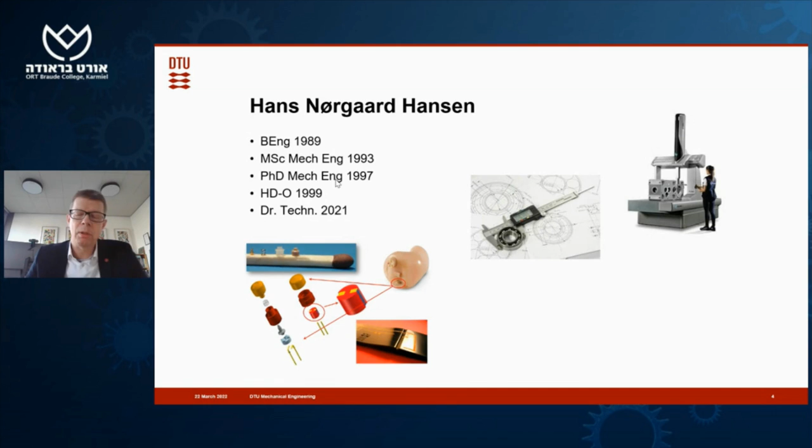If you look at the left bottom picture of this screen, you see a hearing aid. This is a type of hearing aid which you put into your ear. And on those hearing aids, you have many small functionalities like small buttons. The micromanufacturing could, for instance, be how do we actually design, produce, and make quality control of mechanical components which are quite tiny, below the millimeter in diameter.

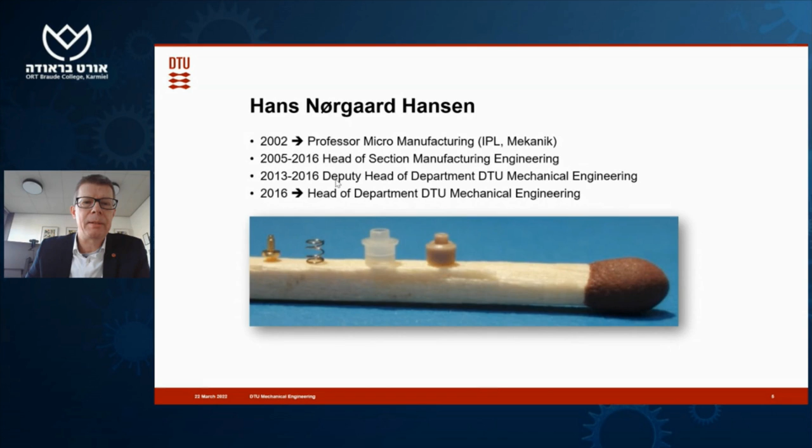I have been taking up different roles at the Technical University of Denmark, currently the head of Department of Mechanical Engineering. And I have also been active in the International Academy of Production Engineering, CIRP, where I'm currently the president. Back in 2017, I was also the president of the European Society for Precision Engineering.

So you may know CIRP, and if you do, please apologize for a few slides. CIRP was founded back in 1951 by 5 professors from France, Belgium, Great Britain, and Switzerland in order to promote scientific understanding of production engineering technologies in general.

Still today, CIRP is having a world-leading role in the field of production engineering to promote research and development among members coming both from academia and industry, to contribute to the environmentally sustainable global prosperity and well-being of society. CIRP is following that vision by...

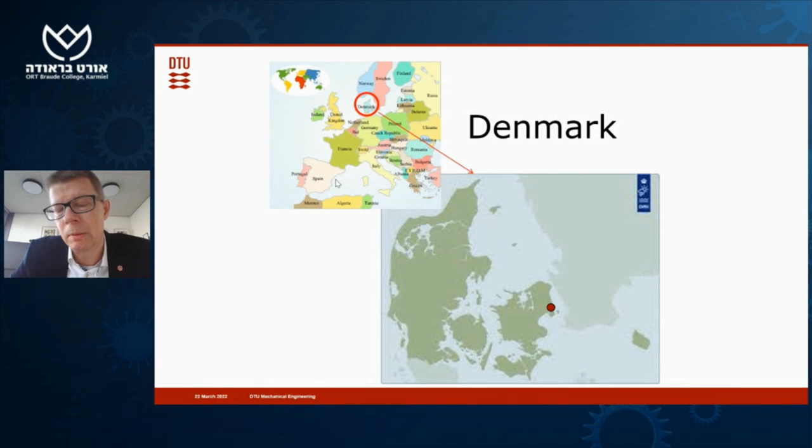So Denmark is a relatively small country that you may know. We are in the north of Europe. The Technical University is located near Copenhagen, which is the red dot here.

And it's actually a quite old university. It was founded back in 1829 by Professor Ørsted, the discoverer of electromagnetism, but also of aluminium. It was actually founded as a spin-out of Copenhagen University, with the purpose at that time to develop and create value to benefit society by looking into natural sciences and technical sciences.

And still today, this is the mission of our university, which means that, of course, we aim to do research at the highest level, but always with the intention to have the research results go into work in society, in the companies around us.

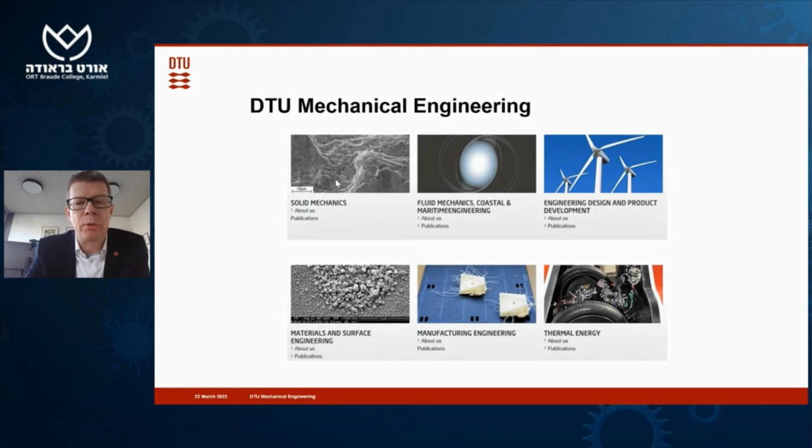The Mechanical Engineering Department is structured into 6 sections you see here, of which Manufacturing Engineering is one, and of course that's where I'm going to focus my talk today.

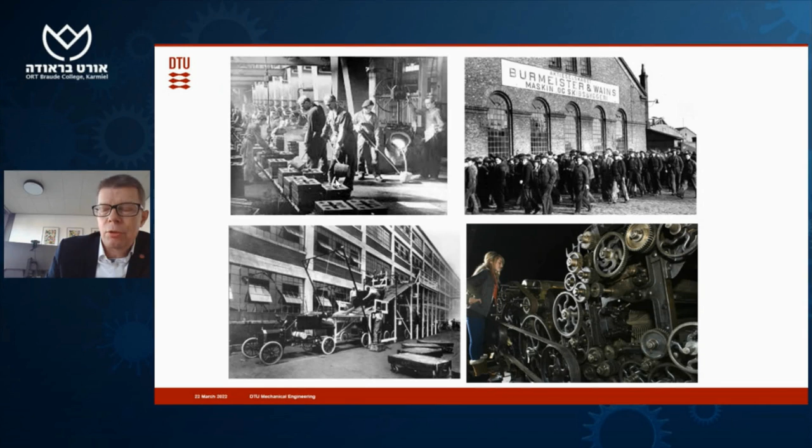The matter of fact is, of course, that modern production and modern manufacturing is far from that reality. And when people are then introduced to the reality as it is seen today, they get quite intrigued and interested in also pursuing research within the field of manufacturing.

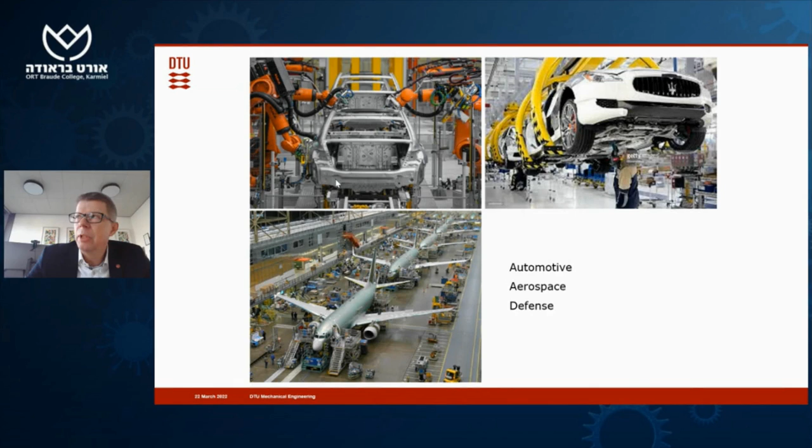So traditionally, I may say that usually a lot of research and development within manufacturing is driven by automotive, aerospace, and defense sectors. And if you look at Denmark, we are not having any of these sectors. In fact, the production sector in Denmark is relatively different from what you see in big countries like Germany, France, or UK.

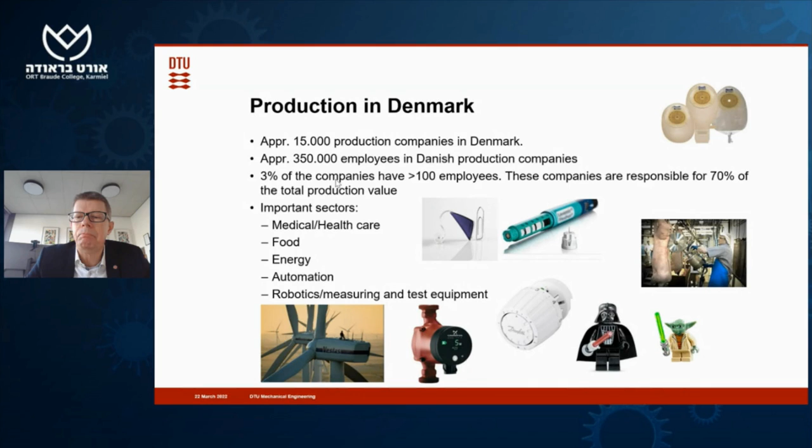This is background for discussing, back in 2000, the situation of Danish manufacturing industry and the level of competence in that industry. On the basis of that, the Danish Industry Association, together with leading companies and universities in Denmark, proposed to start the Manufacturing Academy of Denmark, in short, MADE.

At that time, outsourcing was the big animal in the discussion. If we could just outsource to low-wage countries all our manufacturing, then we would be in a good spot for the next many years. But what also happened was that the companies, the big companies first, realized that by outsourcing production, product development skills also slowly but surely disappeared. Around 2010, the big companies realized that something needed to be done if you wanted to maintain a leading position as a product developer and manufacturing company also in Denmark.

So a political effort was made to set aside some money that could be applied for by a consortium, and this was done in 2013. I was one of the professors writing these proposals, and the organization was launched back in 2014.

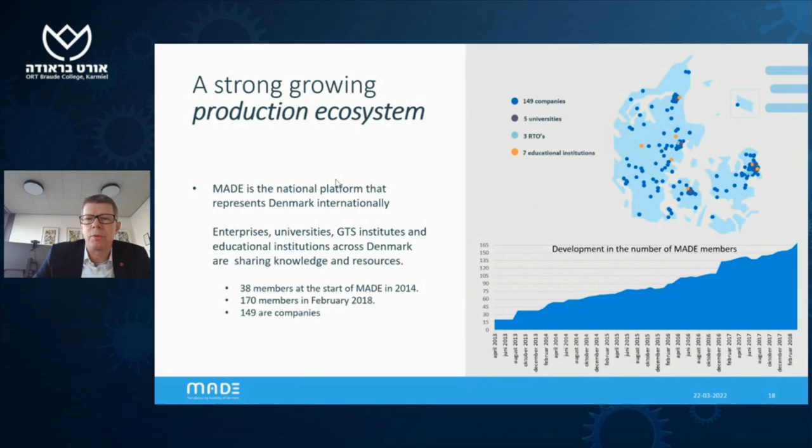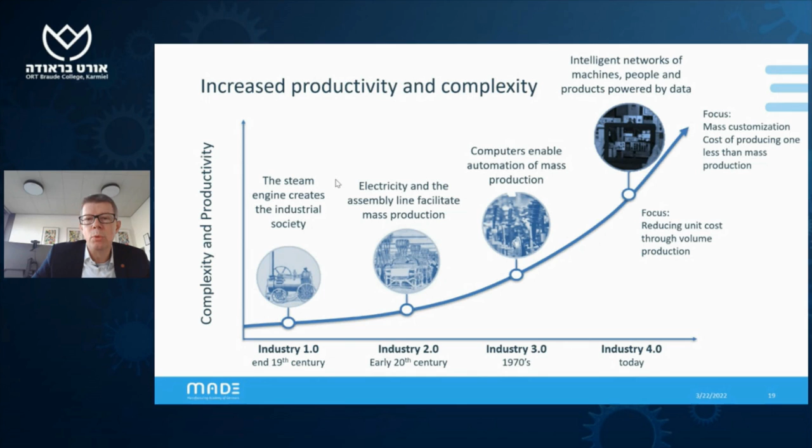Also, in the period from 2010 to 2020, the increased pressure on companies of all sizes due to the digitalization of manufacturing has become quite intense. So the pressure to change has been significant, not only because competitors were pushing companies, but also because customers, big companies, were putting a lot of pressure on their suppliers, the small and medium-sized companies, both in terms of components and technology. This has of course helped move the attention towards also performing research.

So how do you get a very diverse group of companies to actually agree on anything? That was the big question back in 2013, where I used a couple of months together with two colleagues to tour Denmark, to visit companies and hear what their problems were, and consider what a program addressing these problems could look like.

What you see here is a 3x3 matrix. The columns have titles, and these titles you could call focus areas. After these two months of road trip, it was quite clear that most companies were interested in performing research that could help them get product and production developed at a higher speed. Many were interested in how to use models in their planning, execution, and optimization of production. And quite a few were interested in either lowering complexity of their production systems, or being able to manage higher complexity than their competitors. So these three columns mark the industrial interests.

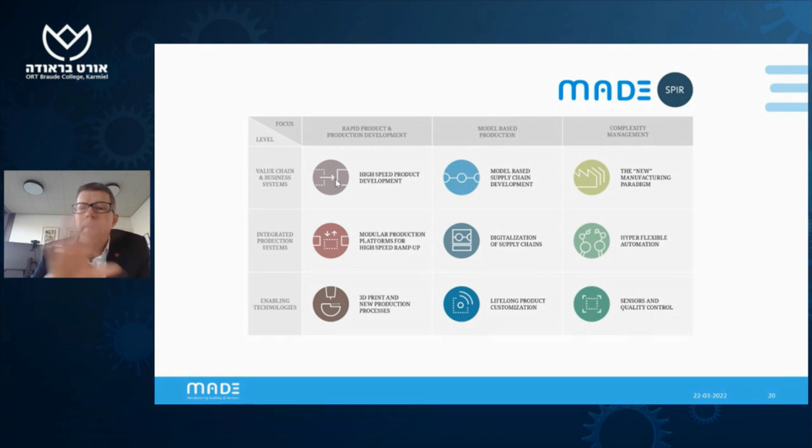So if you were a company like the Danish company Grundfos, who makes pumps and pump solutions, they were focusing entirely on the first column of rapid product and production development. A company like Danfoss, making heating and cooling solutions, were primarily interested in hyper-flexible automation. And a company like Lego, producing toys, were primarily interested in enabling technologies. In this way, the framework and focus areas of single companies were then spread out across this matrix.

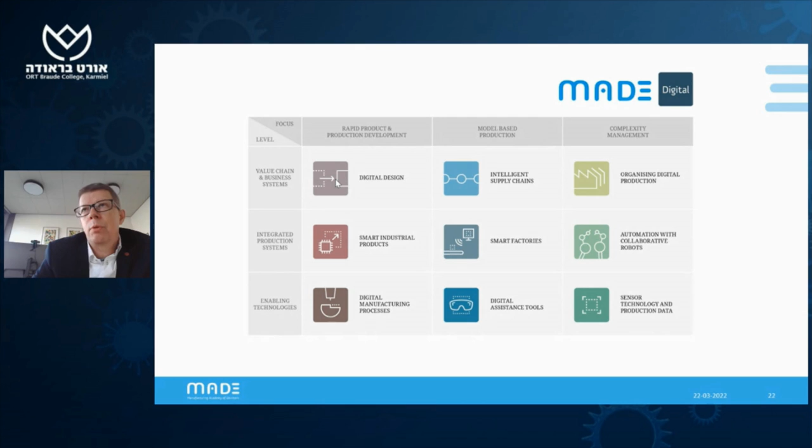As time went by, 3-4 years, it was quite evident that digitalization took up speed. A digital layer was put on top of the original layer, still spanning the same 3x3 work packages, but now with a digital touch. This led to a new application, a new funding scheme where digitalization was in focus. Still, companies would have to find themselves and their challenges within this scheme, and many actually moved from the first scheme to the second, broadening their field of interest after having seen how it worked in the first place.

The working principle would be to start by identifying industrial challenges, based on that define research activities, run pilot projects in the companies who have been defining the industrial challenges, and then take out general learning points that could be transferred to the large number of small and medium-sized enterprises out there.

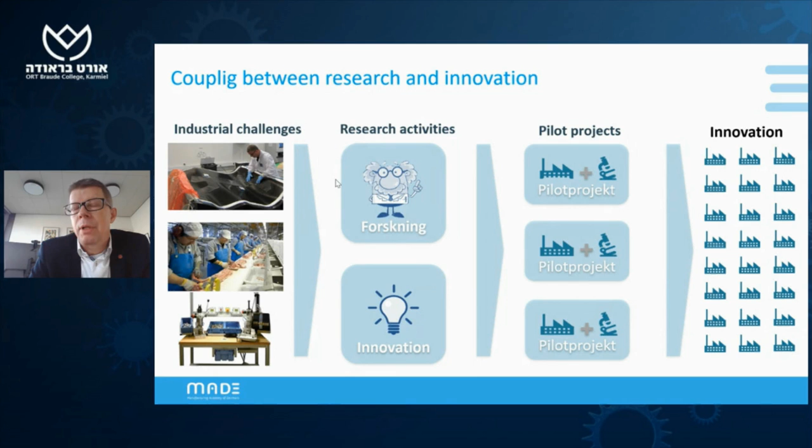To give an example on hyper-flexible automation, 3 industrial challenges were identified. One was related to how to automatically place carbon fiber mats for fiber reinforced plastic components. You see a picture here.

Another challenge would be to make reconfigurable automatic meat packing, where the components or products change component by component. And the last challenge was to have reconfigurable automatic assembly systems, where one day you'd be able to assemble a certain type of component and then quickly turn it over to do another type of component or another type of task the next day.

Research activities defined on the basis of these industrial challenges were the ones you see in the second column. These could be about delicate handling of deformable objects, real-time detection of such objects, part feeders, automated configuration of vision and sensor systems, or automatic design of a robot platform for industrial assembly.

These were, for instance, the titles of PhD projects, where PhD students worked on research activities, hopefully resulting in input that could be demonstrated in pilot projects at these 3 specific companies where the pictures are taken.

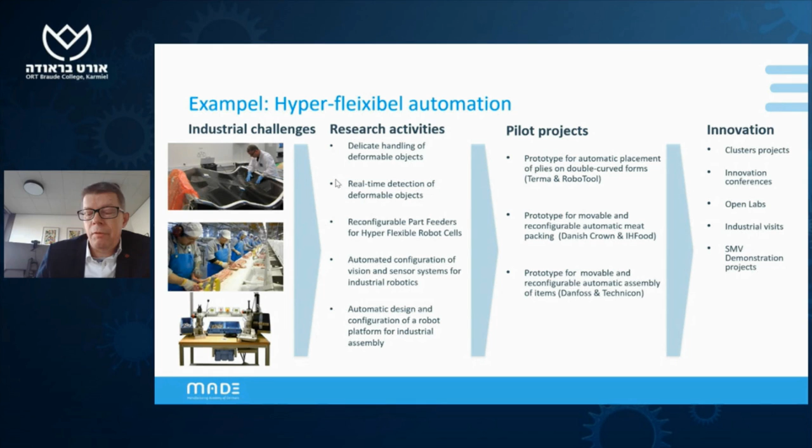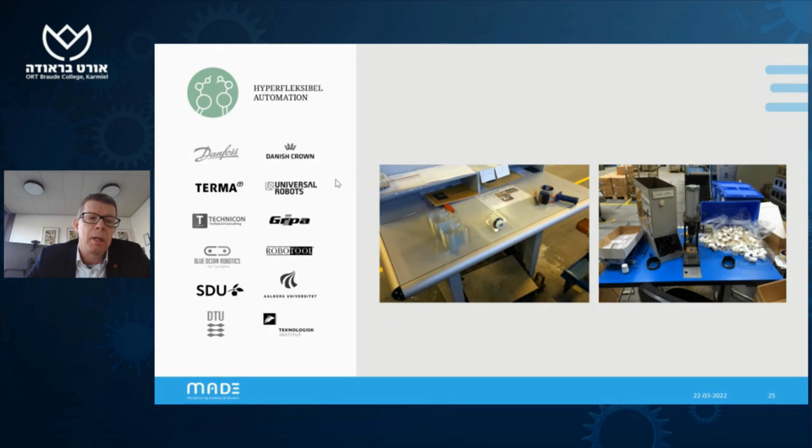Just to show you some of these projects: here you see 2 different products of the Danfoss company, who wanted them handled and assembled within the same assembly station. You see on the left-hand side the parties involved in that, and here a small video showing how the robot and the stations look, and how you can easily reconfigure them.

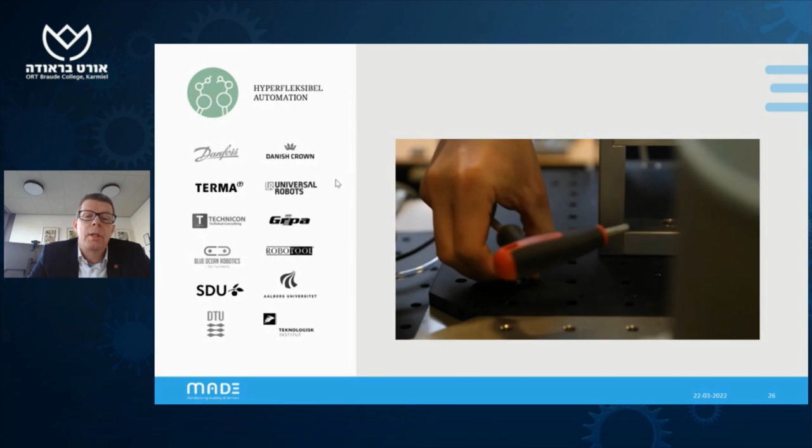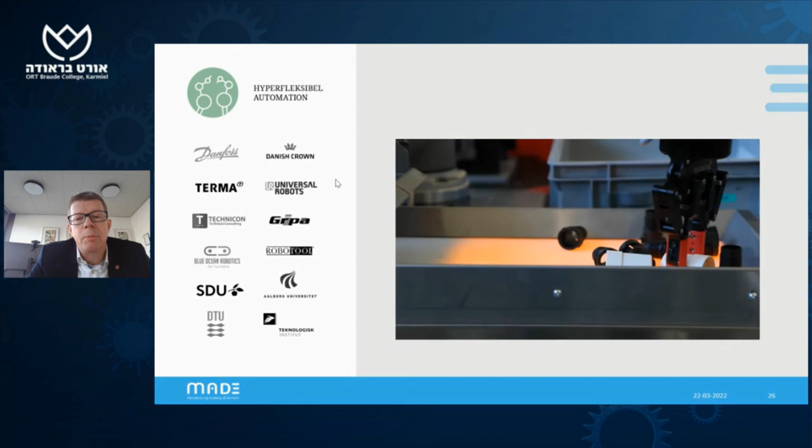The pilot project as such, you could argue, is probably not research, but in order to make the pilot project run, quite a lot of research had to be done, and this was performed in the PhD projects. So there's always a delicate balance when working with industrially relevant projects, to maintain focus on research content as well as the application.

This slide is in Danish. It's not meant as a free Danish course, but I didn't want to translate it.

Along the line of this initiative, the granting body, the Danish Innovation Fund, made a midterm review. What they did is ask the companies, for the specific solutions that have been provided, what is the value, or the increase in productivity, that you see directly from those activities? That's circle number 1, and you see 90 million Danish kroner.

They were then asked, if you were to implement those results in parallel production systems, what would the value be? That's bullet number 2, approximately double. And then, of course, the rest is speculation.

But let's say other companies in the MADE platform would have similar challenges. If those solutions were implemented in the MADE companies, what would the benefit be? There you see it suddenly gets quite big. And if we were to forecast, if all relevant Danish small and medium-sized as well as big companies would implement these types of solutions, what would the value creation then in fact be?

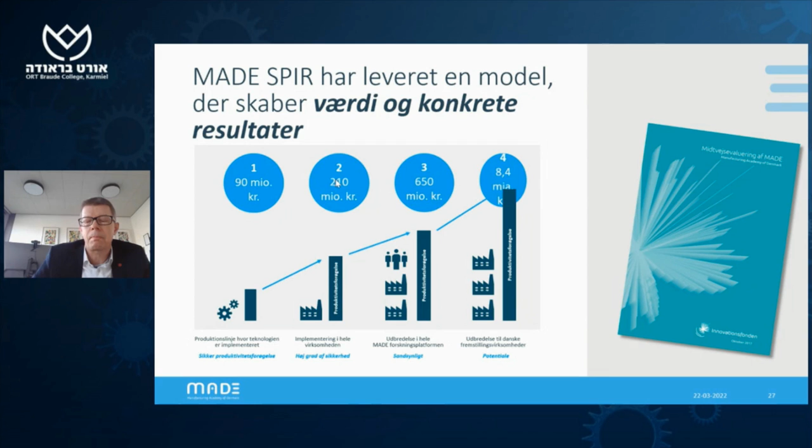So the Danish authorities, based on these types of analysis - and I admit you can always discuss the numbers - were quite happy with the investment, because the initial investment of the Innovation Fund was only, I would say, 64 million.

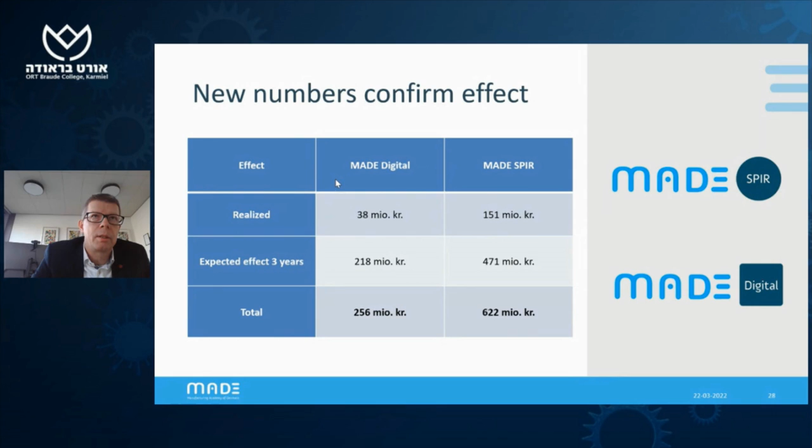Here you see again some numbers, taken when the first project was quite mature and the second project, MADE Digital, was only in its infancy. From a societal point of view, the total investment in these two projects was around 120 million Danish kroner. So you don't need to be a big professor to understand that the payback is actually quite good from this investment.

MADE platform uses a lot of channels to professionally communicate results, events, and so on. Made.dk would be the website. So if you are interested, I would urge you to go in, you can follow it.

All the companies who are part of MADE can follow these activities, can enter the conferences, can go for open lab visits and so forth for free. They pay a membership fee, and that allows them to gain access to all of this.

So two years ago, it was decided to go for a third round of funding. Every time, I guess it's the same in your country, you have to apply for funding, you have to come up with new ideas. And the new idea here was to focus more on sustainability and creation of talent.

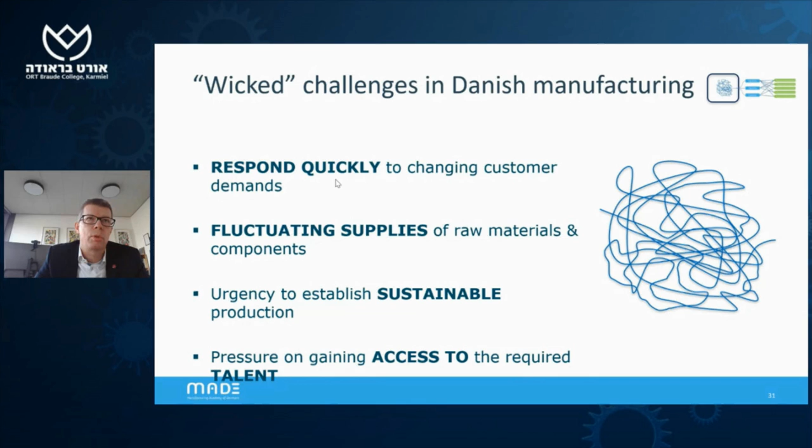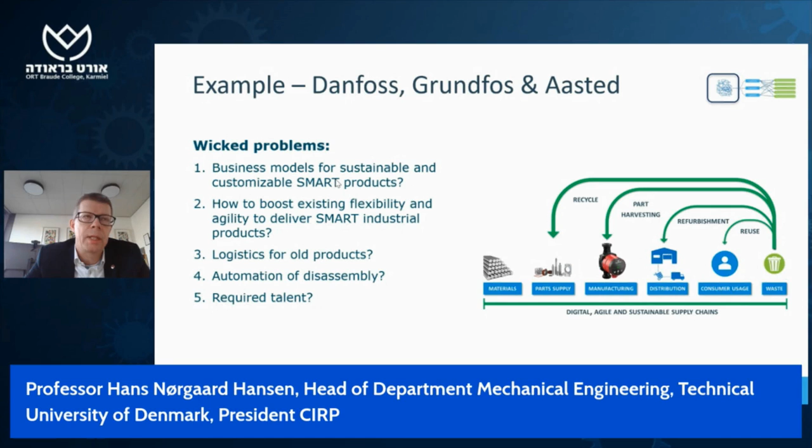Challenges were still the same, or even intensified over the years: quick response to changing markets, fluctuating supplies, increased pressure on sustainability, and the fact that companies are short of good skilled people to do the production. So many companies in Denmark struggled with how to actually go into this sustainability loop, into circular economy, and also what are the consequences for the way they organize themselves around that, from a product point of view but also from a production point of view.

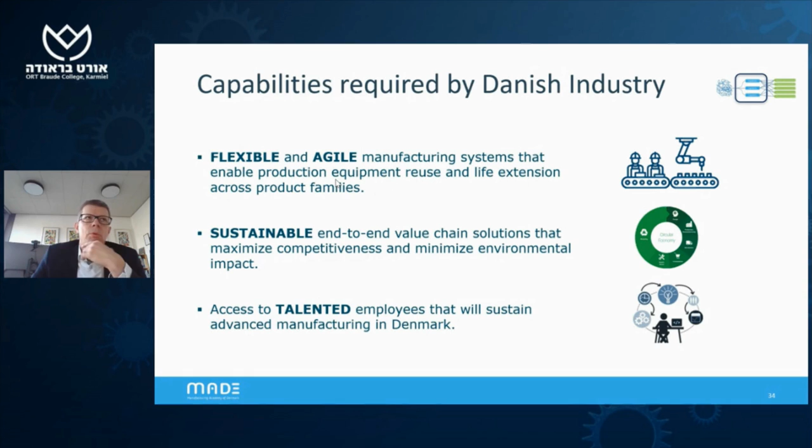So we used in the definition of this third initiative this technology development approach, and all the companies could agree on three main topics: flexible and agile manufacturing systems, sustainability, and how to get talents. That led to a different model, because something needed to be new for the funding agency. Again working from the very basic technology level to the business model level, but now on top of that, working on how to actually come up with the relevant competences for our workforce.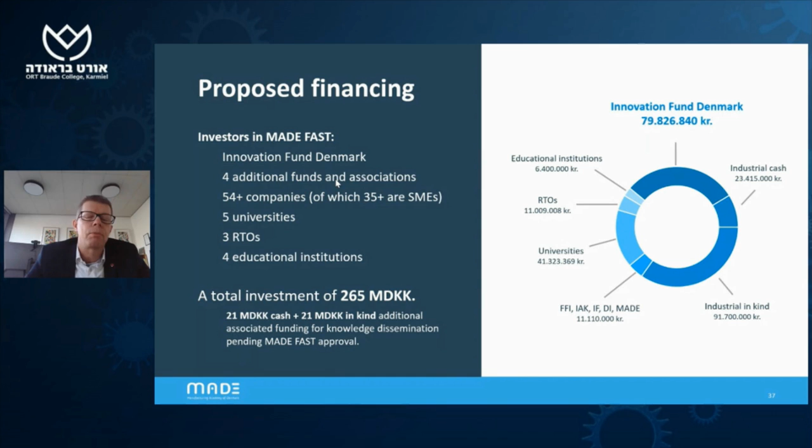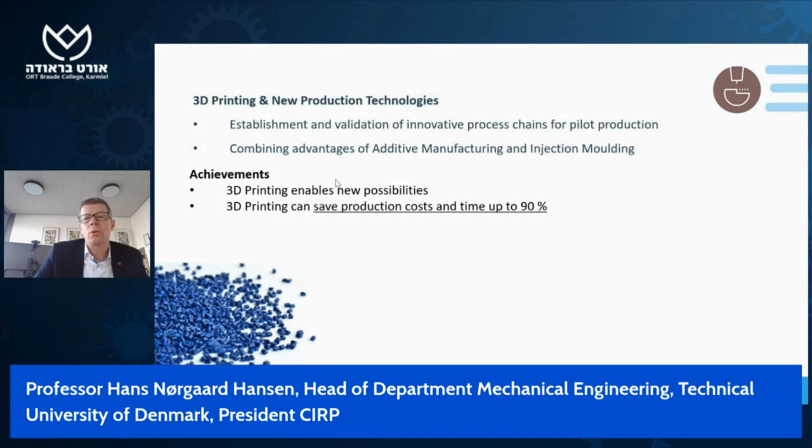Then I'll share a few thoughts, examples of what has been made under this platform about process chains for prototyping and pilot production based on additive manufacturing and injection molding, and of course 3D printing. I'm not going to talk much to you about that.

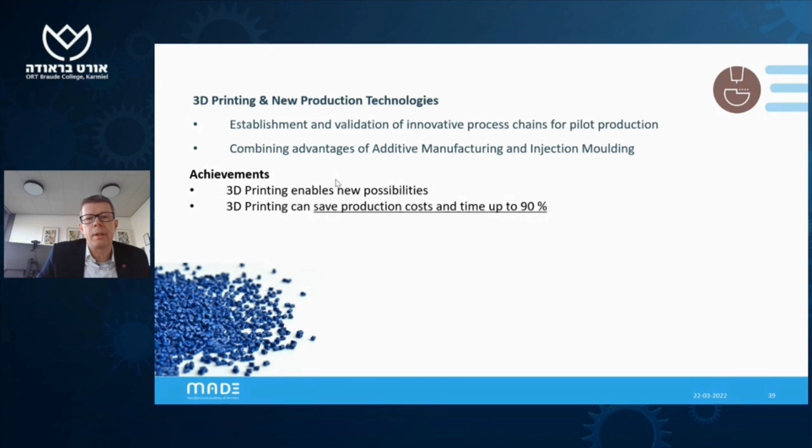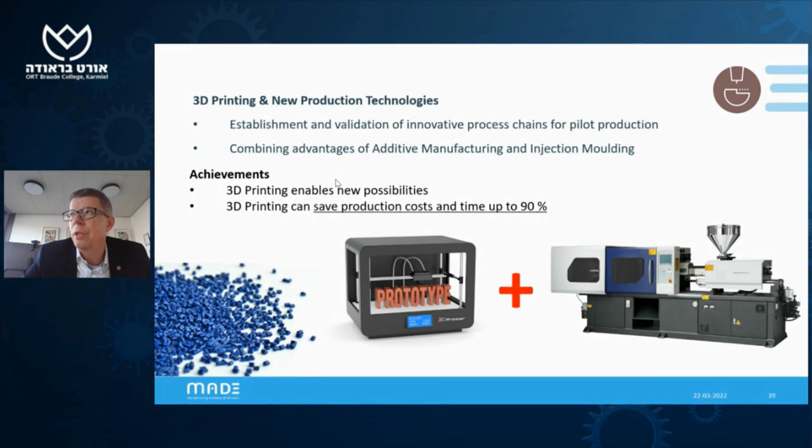If you 3D print plastic components, you may have problems getting the same material or mechanical properties of your parts as if you, for instance, injection mold them. So having a combination where you can quite quickly make mold inserts for injection molding and then injection mold was interesting. Of course you can make metal additive manufacturing to make permanent molds, but the idea here was to make polymer molds.

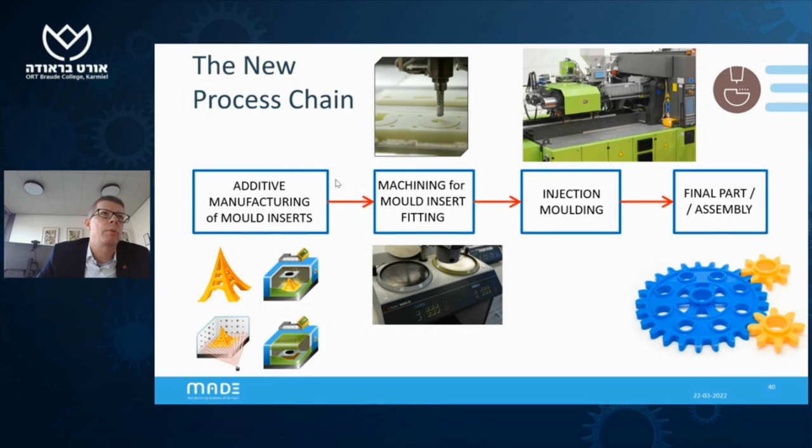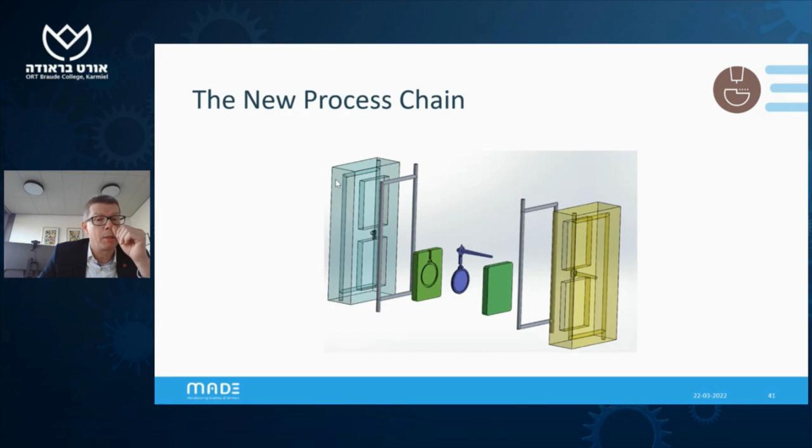We investigated this process chain. You will be able to find companies on the market who provide this service, but here the idea was to see how precise can we go and how can we work on the lifetime. So working with modular molds like this, where the green parts are the mold inserts which are 3D printed, fit into molds and then run with industrial machines in industrial settings with the industrial process parameters you would look for.

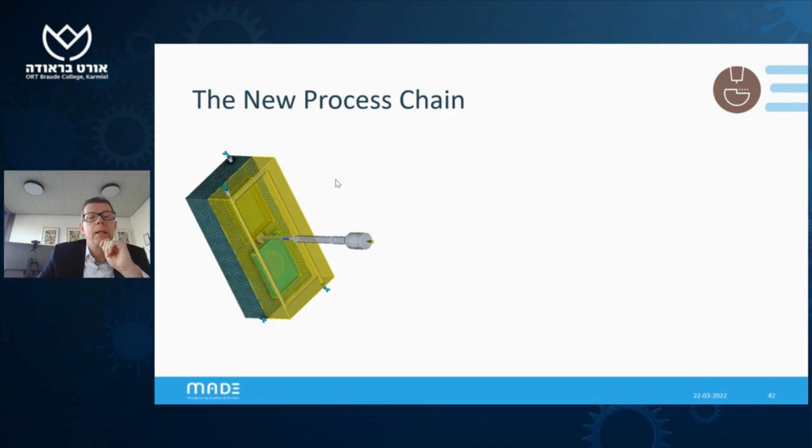Of course it gives you some challenges, because if you take a plastic mold, it doesn't have the same thermal or mechanical properties as metal molds, and that would influence the lifetime of the mold material.

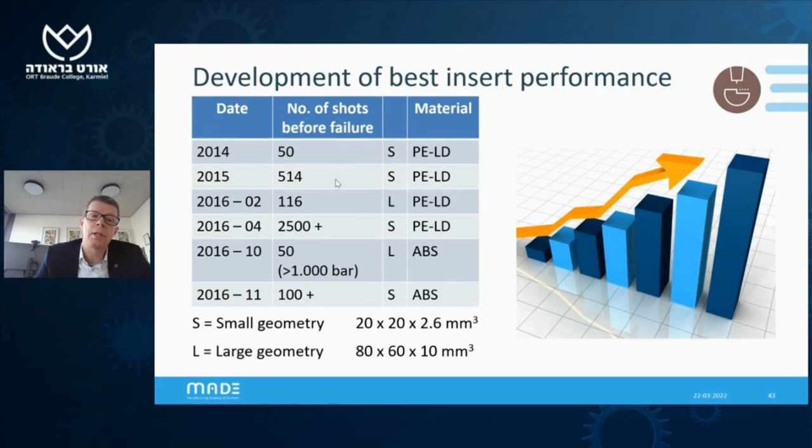We have reached, a couple of years ago, 10,000 shots in polymer molds under basic injection molding conditions, and with those types of results, suddenly for industry it becomes relevant to run pilot production with these types of methods.

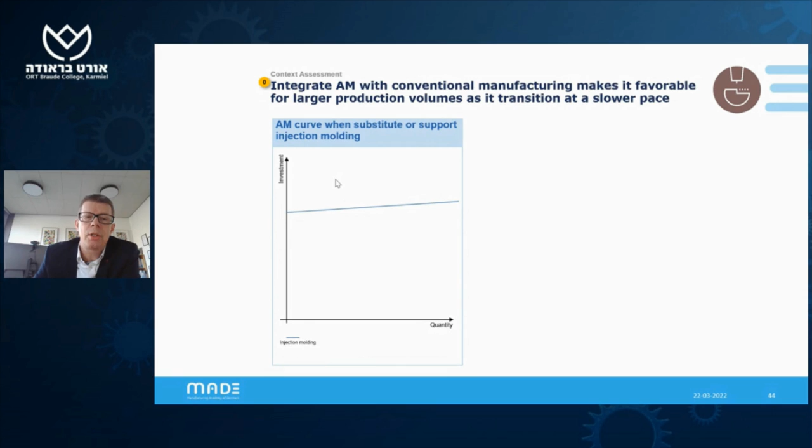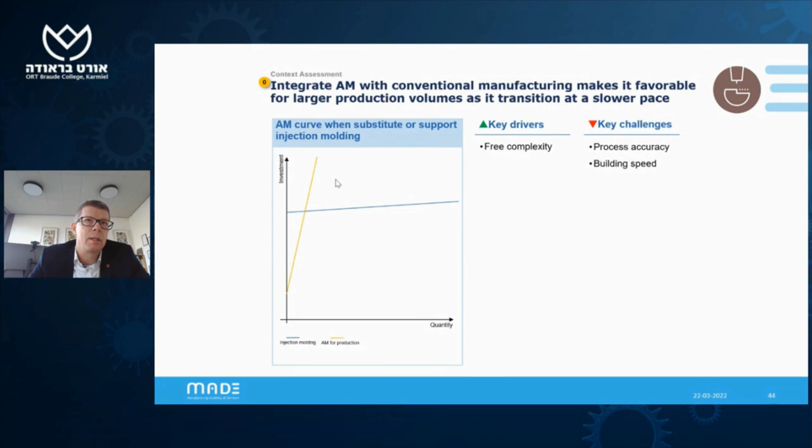The argumentation is, of course, that if you take an ordinary injection molding machine process, you have quite high initial investments. In additive manufacturing, your initial investments are not very big, but scalability is quite expensive. Therefore, combining that to use additive for making tools that may not last as long as a metal mold could be interesting.

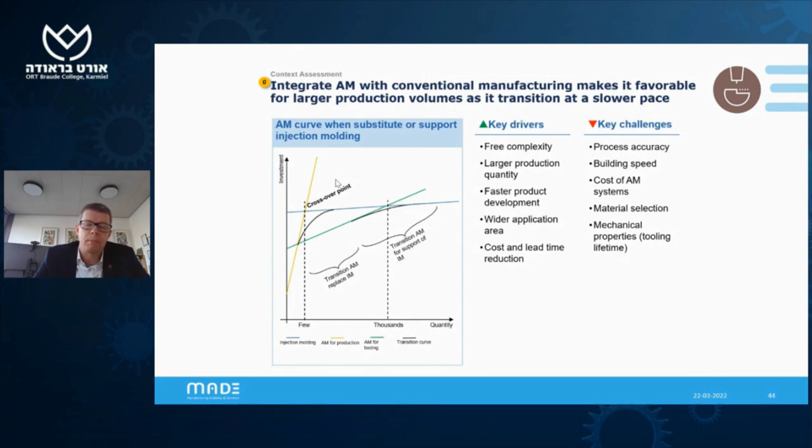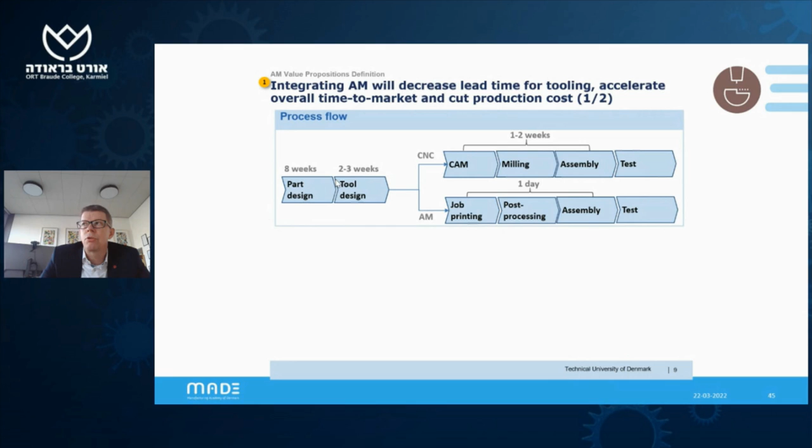We found that with an ordinary milling scenario of molds or mold inserts, you can actually cut your lead time by at least 1 or 2 weeks, which is interesting for many companies who want low lead times. And of course that affects the tooling costs, as you see here.

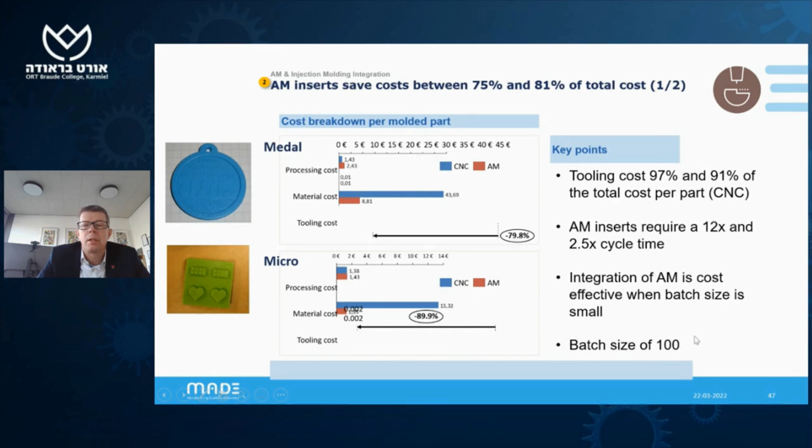We found that you could actually reduce tooling costs by around 90% in these two cases. And here you see the batch size that was interesting in this investigation was 100.

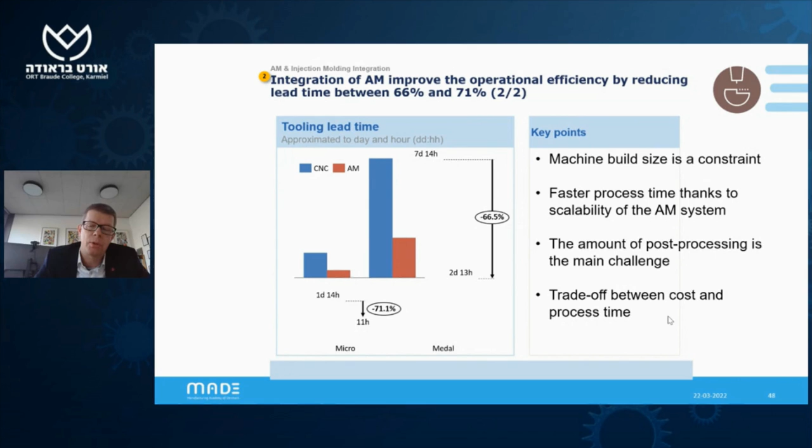Also interesting is the lead time, and in particular a company like the Danish Lego company producing toys are interested in testing new ideas with a very low cycle time, so a very high rate of repetition, and preferably in the materials that they also get when they do injection molding in an ordinary process, and therefore this is interesting.

We also conducted research together with companies under the MADE platform in doing what we call freeform injection molding, which is a low-pressure injection molding process where we use a 3D printed polymer mold, which is then, after the injection molding, dissolved, because you cannot get the part out in any other way. This, by the way, was also published in CIRP a couple of years ago.

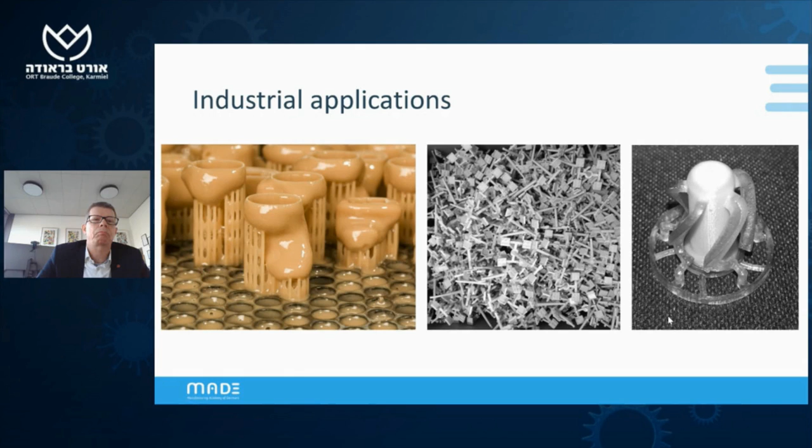And so recently we then combined these efforts with computer vision and some kind of machine learning, or at least neural networks.

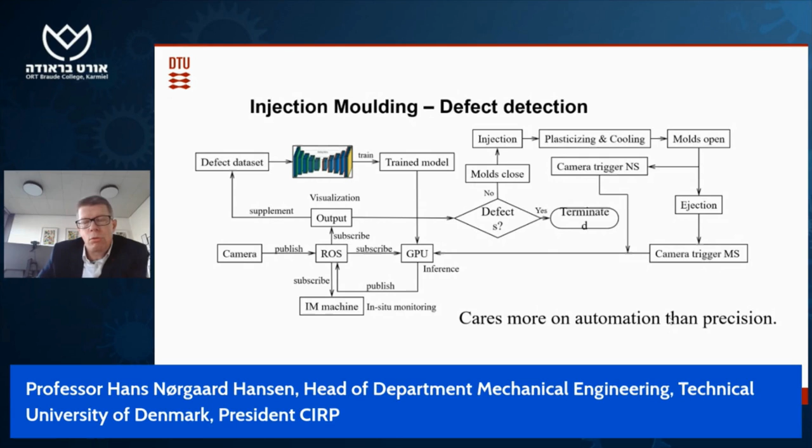I'm not expecting you to understand this graph in detail, but it shows that if you work with image processing of, for instance, pictures taken in an injection molding process, you would need to connect decision points with the pictures, and you would need to understand what it is you're going to look for.

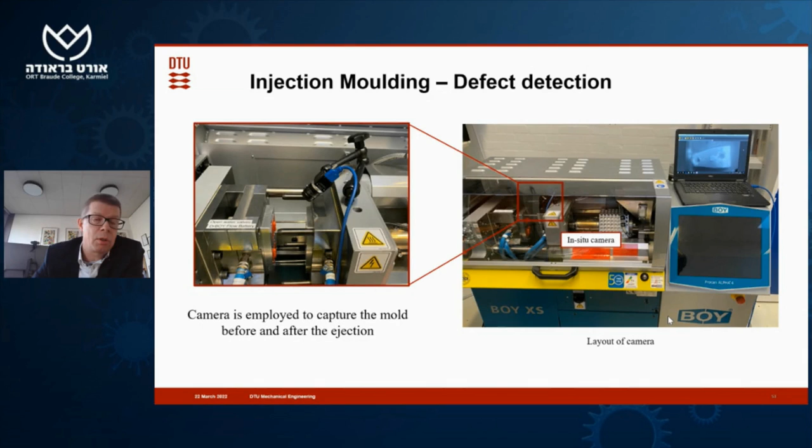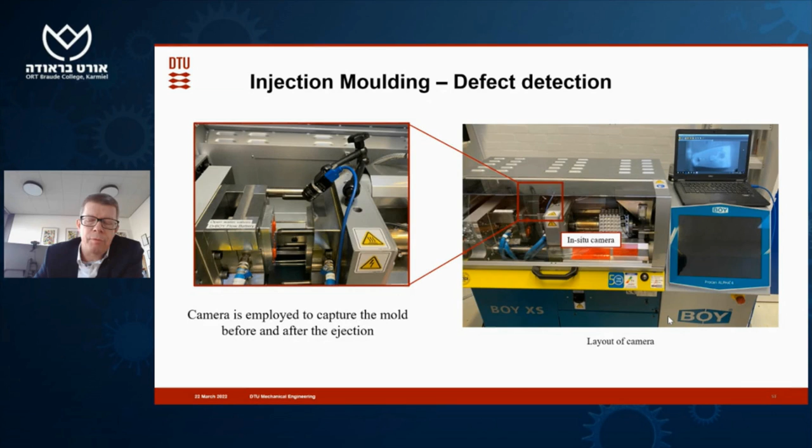And so we have conducted a research project where we equipped these types of injection molding machines with cameras. What you see here is one camera taking an ordinary picture, but also infrared cameras looking into temperature distribution.

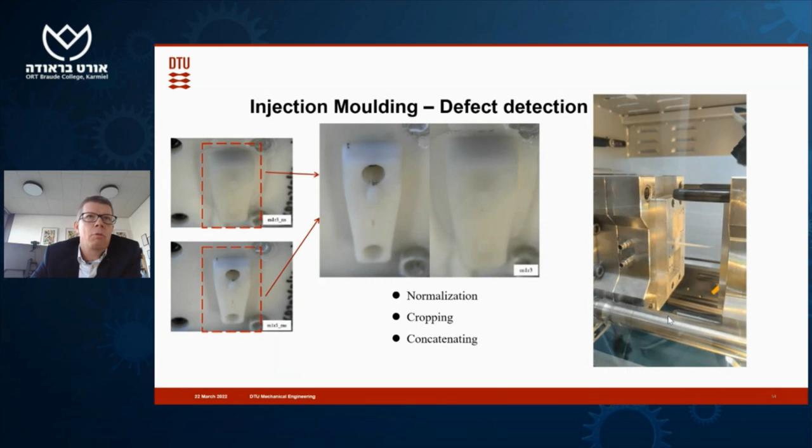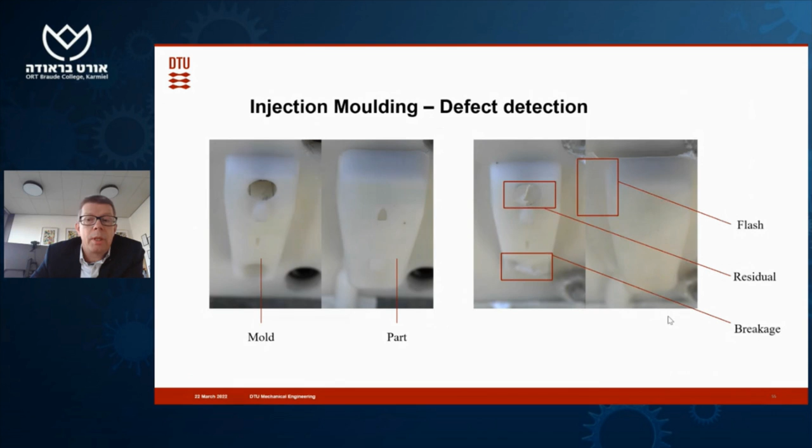Then we analyze the pictures, both of the parts and the molds, in order to collect a lot of data and to understand how wear is progressing in these relatively soft tools, using advanced image recognition methods to, for instance, recognize where we have flash, where we have breakage, and residual material.

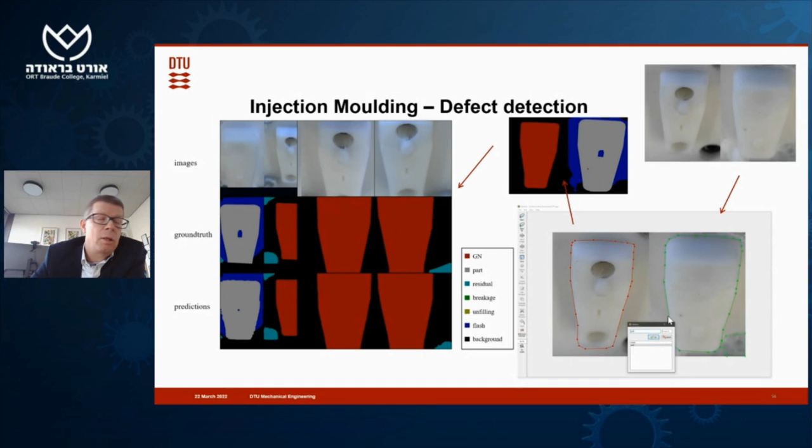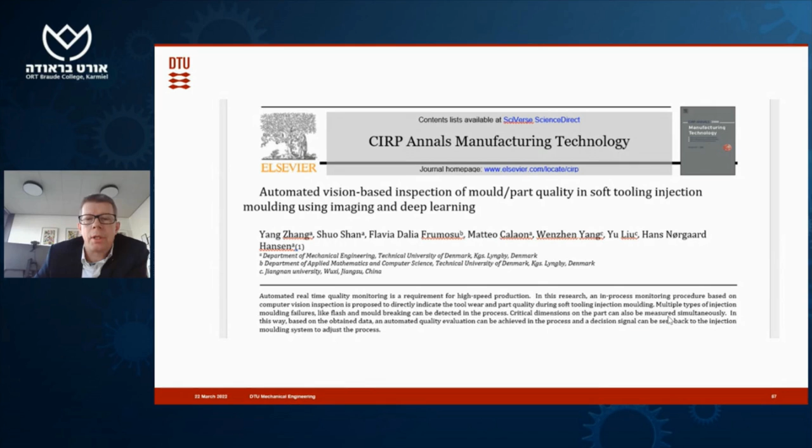Training databases in this way of how these things look, so that we are able to predict a failure in advance before it actually happens, and we can change the mold as it progresses. This is research which has just been accepted for publication, also in the CIRP Annals, for a presentation at the General Assembly this year in August.

So with this, I'm coming to the end. I have presented to you, let's say, the thoughts behind the way we have structured the Manufacturing Academy of Denmark, which is, in essence, a way to have industry and academia work together, but with a big focus on what the industrial needs are.

I mentioned the complexity of the way that this type of program is organized. I've given you a few examples of some of the contents, which of course is always interesting. The network that was created in this aspect is very interesting at a national level, and has also led to many new collaborations. I don't think that MADE has gained an international aspect yet.

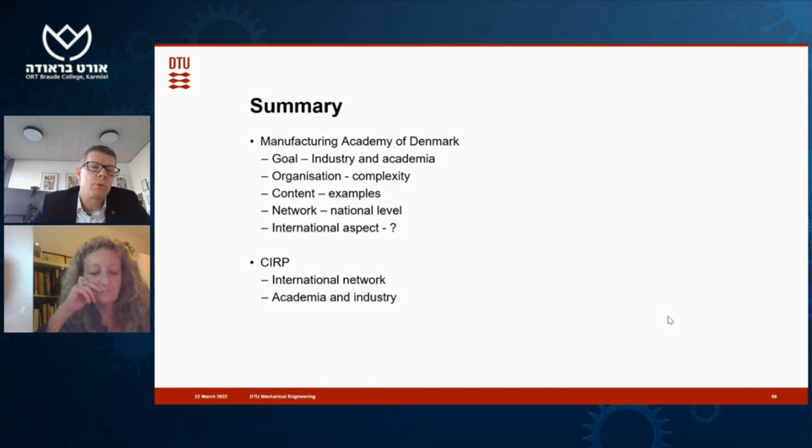It may come. But with respect to the international network, of course, CIRP and the International Academy of Production Engineering is second to none. And here also we have collaboration between academia and industry, but not so much driven by single or specific problems in industry, but let's say in a collaboration between the two.